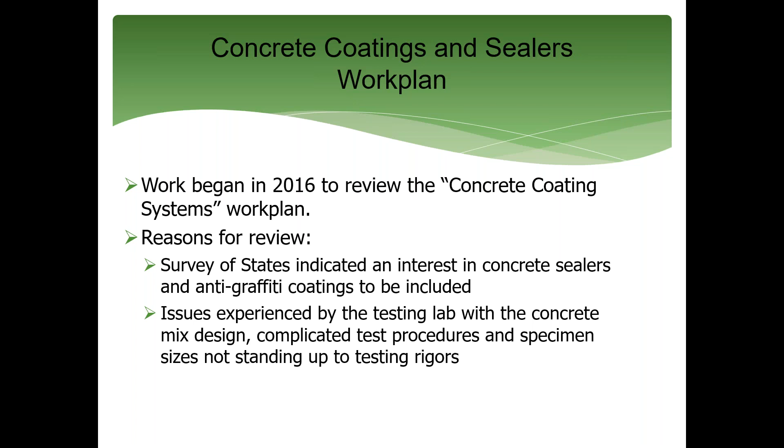The Concrete Coatings Technical Committee formed a task force to review the work plan and research the best practices in the field of concrete coating and sealer evaluation. Amongst those surveyed during this effort were SSPC, industry partners, and states. States were also asked about their needs in the area of concrete coatings and sealers.

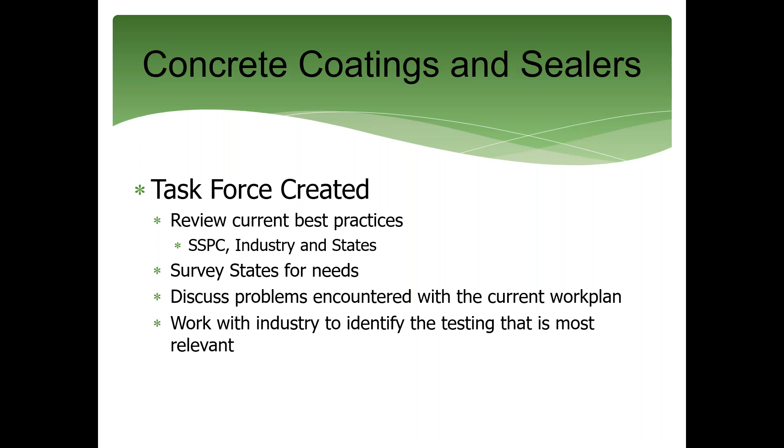The test lab for the evaluations performed from 2014 to 2016 was contacted as well to discuss the issues with the work plan and any improvements that they would recommend. In addition, industry was approached to determine the relevant testing performed by those manufacturers to determine their coating and sealer performance.

What the task force found was that AASHTO TP96 was successfully being used by other agencies to evaluate concrete coatings and sealers. The mix design and testing protocols were being used to effectively evaluate the performance of concrete coatings and sealers. In addition, other agencies have in-house testing methods that include freeze-thaw and scaling resistance, as well as chloride ion penetration testing. The in-house methods were collected and reviewed and found to be similar in nature to AASHTO TP96 procedures.

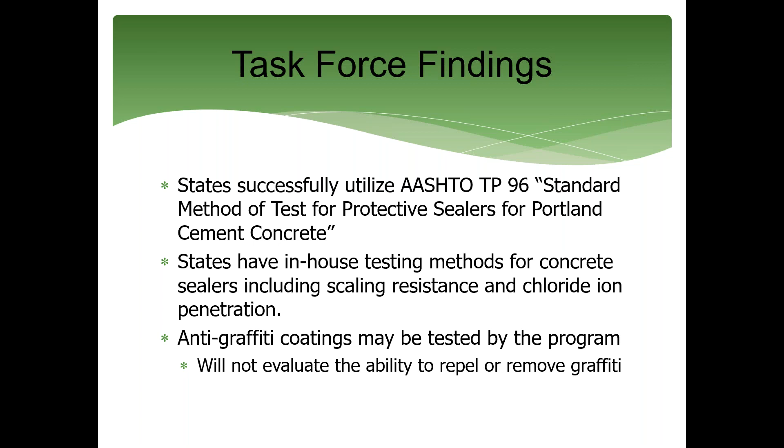Anti-graffiti coatings were also found to be a need at the agency level. The issue with anti-graffiti coatings is the challenge of testing anti-graffiti coating performance as it relates to the ability to repel graffiti and/or remove graffiti. The task force opted to focus efforts on the sealer and coating testing and hopes to add anti-graffiti coating performance testing in later iterations of this work plan.

The task force chose to use AASHTO TP96 as the backbone of the new concrete coatings and sealer work plan. Due to its successful use by other agencies, it was considered a tried and tested methodology from which to build our work plan. TP96 includes the following testing parameters: sealer characterization, water vapor transmission, salt water absorption, chloride permeability, sealer penetration depth or coating thickness, UV weathering and cyclic saltwater ponding, and resistance to alkali.

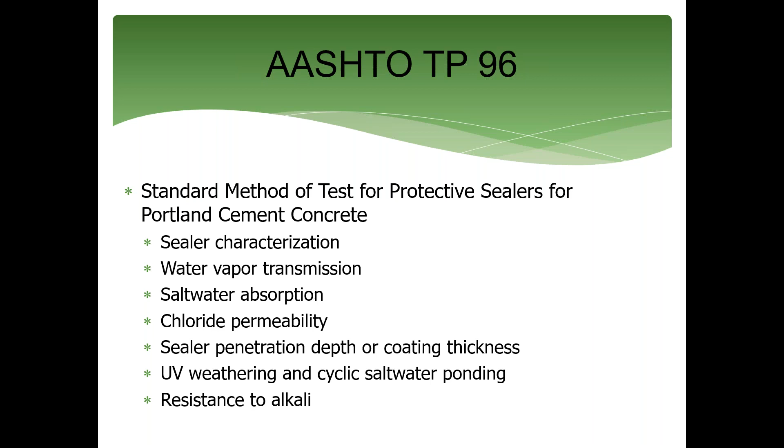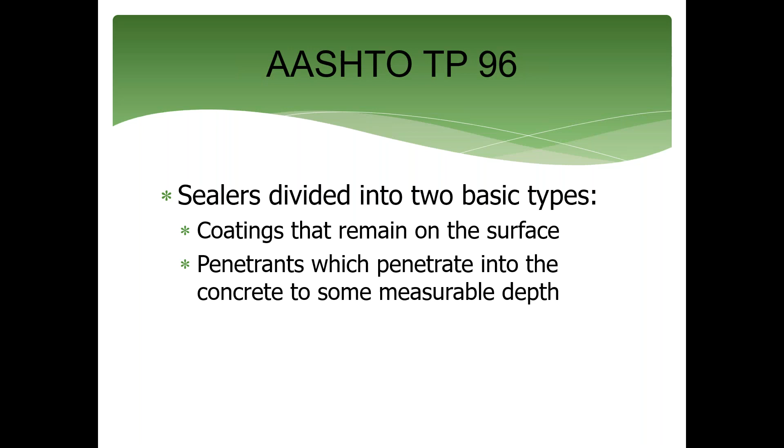TP96 classifies sealers into two types: film forming, or coatings that remain on the surface of the concrete, or penetrating, or materials that penetrate into the concrete to some measurable depth. Concrete coatings and sealers are intended to provide the universal properties of reducing water and chloride ion penetration, extending the service life of the concrete, and they must be resistant to traffic wear and the various environmental conditions the concrete and coatings and sealers may be exposed to.

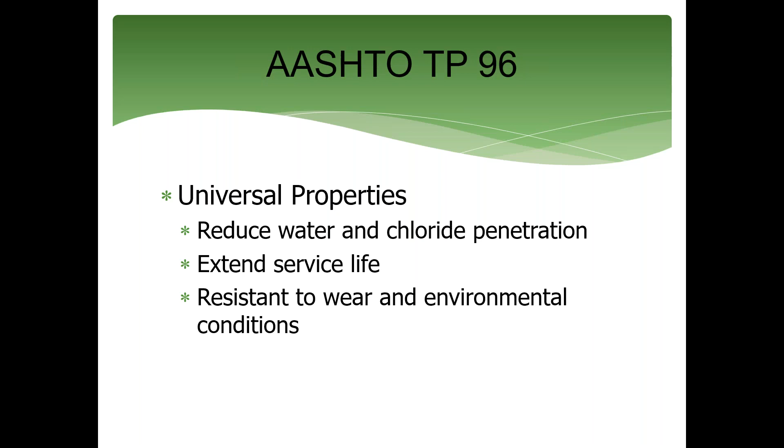The general types of sealers and coatings as defined by TP96 include linseed oil, epoxy resins, silanes and siloxanes, methacrylates, sodium silicates, urethane, coal tar pitch, tar primer, and seal. The work plan includes coating systems that can be applied individually or as a system of multiple coatings.

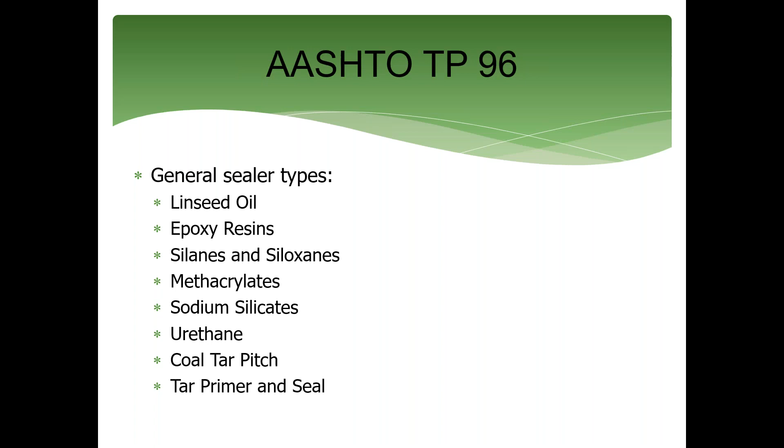The key concepts the task force needed to address in the revision of the work plan were: one, to find a freeze-thaw stable mix design; two, fabricate standardized size prisms for testing procedures, and to combine those two elements to prepare sample specimens that would hold up to the rigors of the testing and allow the performance of the coating or sealer to be evaluated, not the quality of the concrete and/or the weakness of the fabricated specimen.

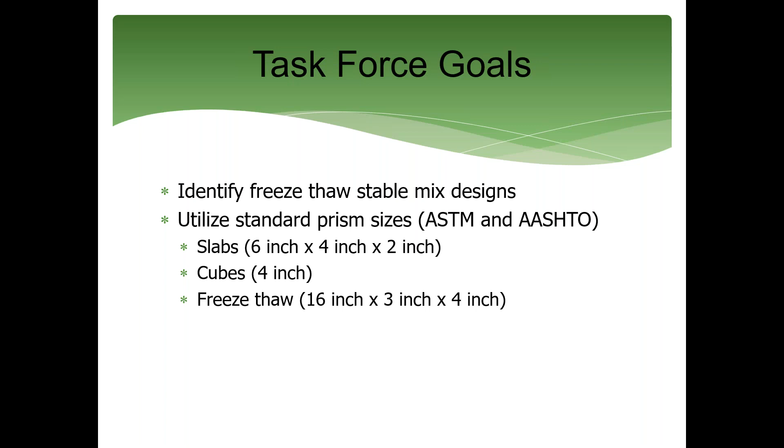Eliminating the weaknesses in the sample fabrication steps and standardizing the methods and mix design are vital steps to the program's success. The standardized prism sizes were gathered from ASTM and AASHTO procedures. The slabs used in the program are 6 inches by 4 inches by 2 inches. The cubes are now 4-inch cubes, and the freeze-thaw prisms are now 16 inches by 3 inches by 4 inches.

The task force was made aware of the industry concerns regarding the quantity of tests performed and the relevance of those tests to expected field performance. The task force attempted to streamline the testing to focus on the most relevant tests. The streamlining of the work plan should improve the timeline of results and lower the overall cost of the program for the manufacturers.

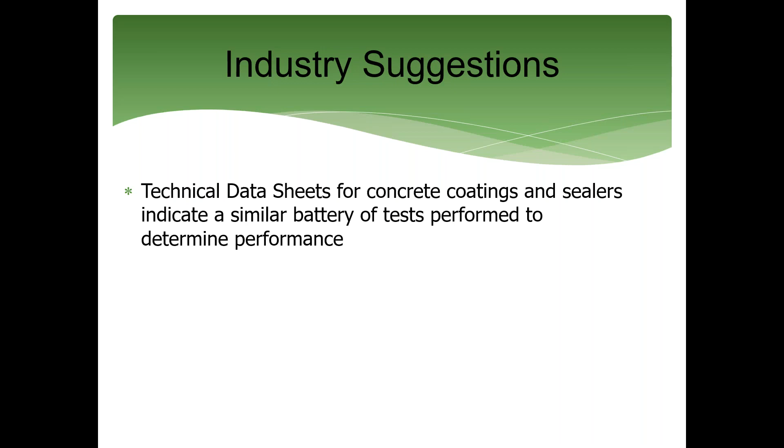The task force reviewed manufacturer technical data sheets for a variety of different materials that fall under the concrete coating and sealer categories. These technical data sheets were used to identify the test methods routinely used and reported on the sheets. The task force cross-referenced many of those typical methods with TP96, and many of the same ASTM and AASHTO methods were employed. This further substantiated the move to AASHTO TP96 as the backbone of the new concrete coatings and sealer work plan.

After extensive research and review, the task force identified the following goals and moved forward to rewrite the current concrete coating and sealer work plan by using AASHTO TP96 as its backbone: work to standardize the concrete mix design or mix designs, standardize the test prism sizes, and work with industry, states, and testing labs to review and edit the final draft.

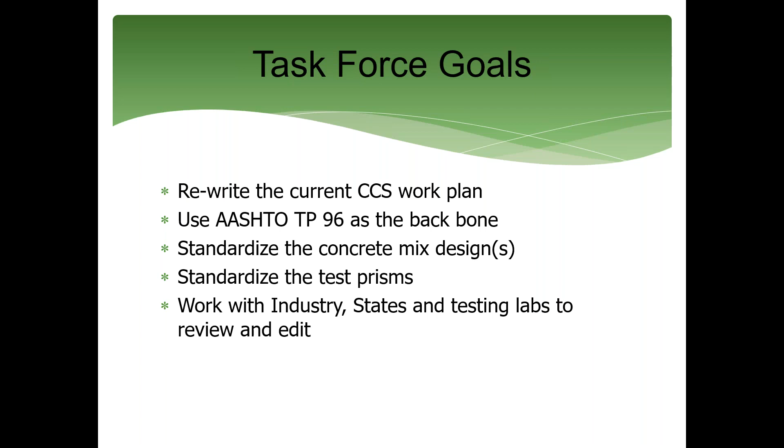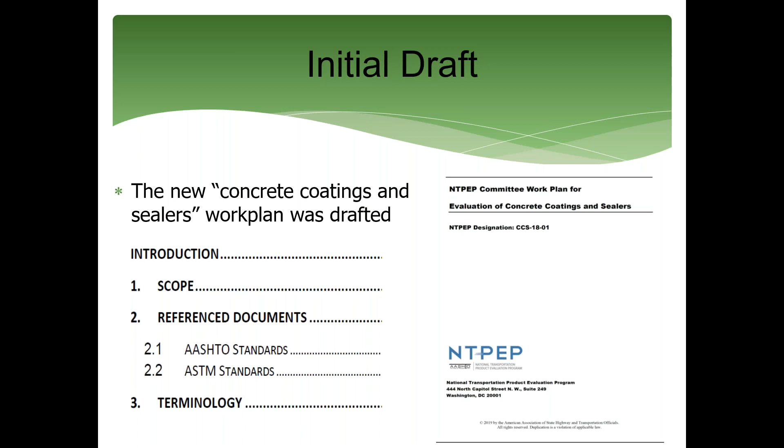The following slides will walk us through the new 2018 Concrete Coatings and Sealer Work Plan. The program was formerly the Concrete Coating Systems Evaluation Program, and with the introduction of concrete sealers to the program is now named Concrete Coatings and Sealers. The new work plan is divided into 8 sections. I will now go through each section of the work plan to familiarize you with the program.

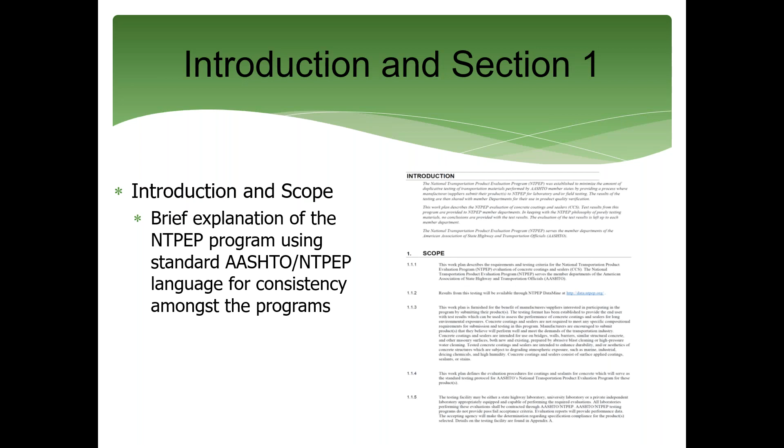The introduction and Section 1 scope provide a basic explanation of the program and include standard language consistently used for all NTPEP programs. Section 1 includes reference to Datamine and how to access results generated by the evaluation program. Section 2 is the reference documents. This section includes all the new AASHTO and ASTM methods used by the program and the primary standards used by industry to evaluate concrete coatings and sealers.

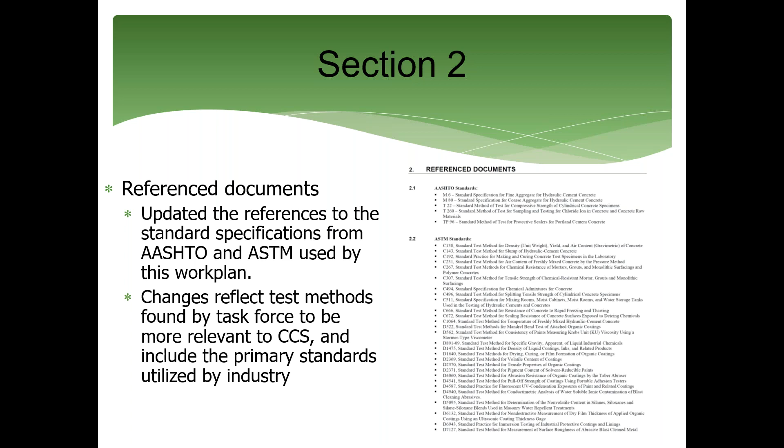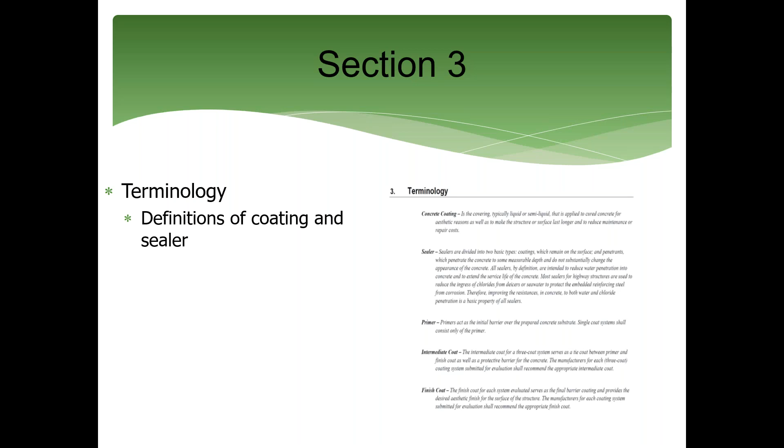Section 3 is the terminology. This just gives you some basic definitions of concrete coatings, sealers, and the coating systems, the different coats that make up systems tested by the program. Section 4 is the program overview. It covers the NTPEP guidelines, responsibilities, and expectations for the lead state, testing lab, and manufacturers who are participating in the program. This section contains standard language consistent with all NTPEP programs.

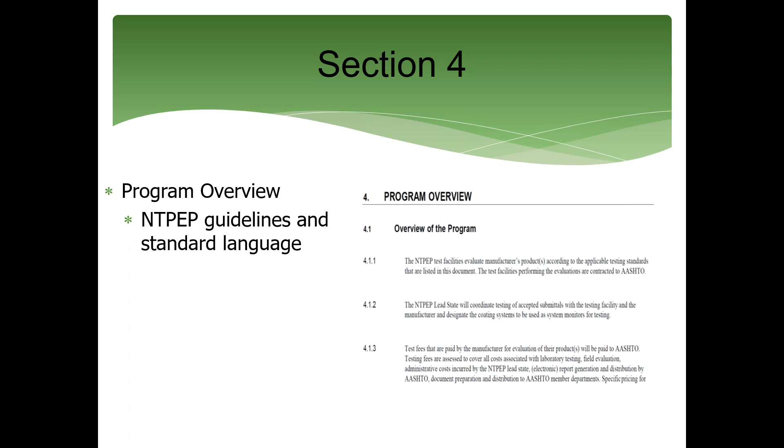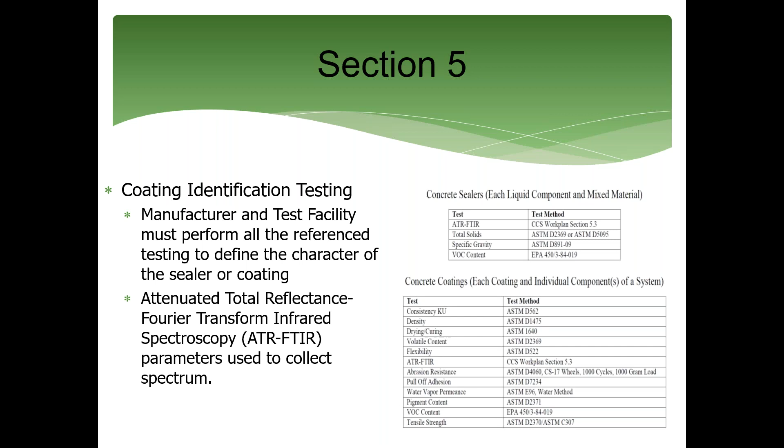Thank you, Kelly. I'd like to talk about the identification testing. It's also called fingerprint testing. It's performed to ensure that the qualified product is consistent with the product delivered for service. The FTIR is the infrared scans that is performed on individual components if the liquid coating material is a multi-component, as well as the mixed material, or if it's a single component material, the FTIR is run on that material only. Both sealers and concrete coatings are tested by FTIR.

Concrete sealers are additionally tested for solids, specific gravity, and VOC. Concrete coatings are tested for VOC and solids using the same methods as the sealers. However, they're also tested for viscosity, density, dry time, flexibility, abrasion, water vapor permeance, pigment content, and tensile strength.

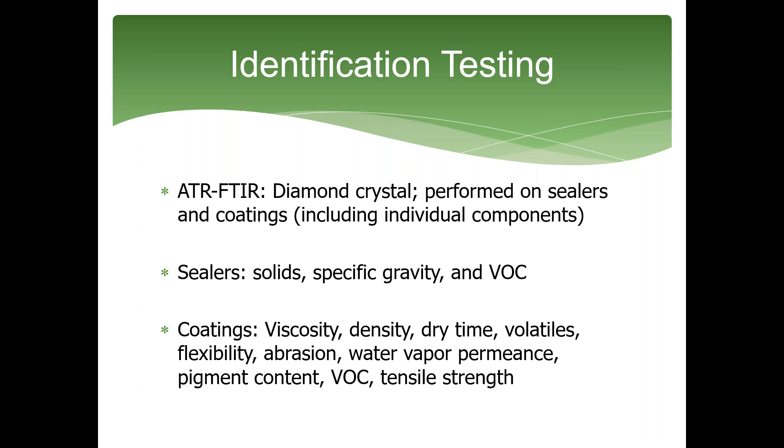Section 6 relates to... Sorry, the performance. I was muted. I've got it, Carly.

Sorry. Section 6 is the performance test to be performed by the testing facility. It includes the heart of the program and where agencies will gain the most value from the program. This group of performance tests includes standardized procedures used to evaluate concrete coatings and sealers. Again, the two categories are broken into concrete sealer performance test and concrete coatings performance test.

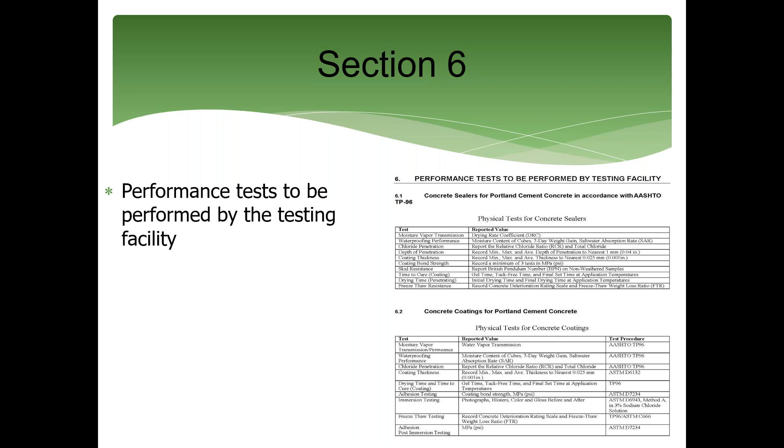For concrete sealers, testing is performed according to AASHTO TP96. 3 treated and 3 untreated cubes are stored at conditions of 23 degrees C and 50% relative humidity, and they're tested for moisture vapor transmission at 0, 7, and 14 days. The waterproofing ability is tested by measuring the weight gain following 7 days immersion in a 15% sodium chloride solution. The chloride penetration is tested by continuing the saltwater immersion and weighing the cubes at 14 and 21 days.

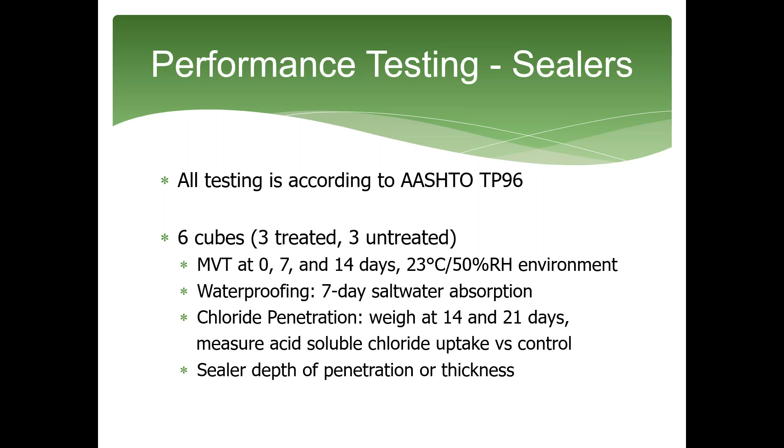The cubes are then split in half. Half is tested for chloride according to AASHTO T260 at 4 sampling depths, and half is tested for sealer penetration or thickness. Penetration depth involves immersing the sample in a solution of dye, and the coating thickness can be determined by ASTM D6132 or microscopic examination. Coating bond strength is evaluated according to the pull-off adhesion test, which is ASTM D4541. Skid resistance is evaluated for both treated and untreated specimens by the British pendulum method.

Curing properties are evaluated differently for penetrating and coating type sealers. Both involve drilling a 3/4 inch by 3/4 inch hole in the cube. However, the coating type sealers are tested for gel time, tack-free time, and final set. Penetrating sealers are tested for initial and final drying time. In both cases, the testing is performed at 2 temperatures.

Freeze-thaw resistance is performed according to ASTM C666 method A. Every 100 cycles, the sealed samples are weighed and visually examined. Samples are tested for a total of 300 cycles. The samples are evaluated on the concrete deterioration rating scale, and the freeze-thaw weight loss ratio is calculated.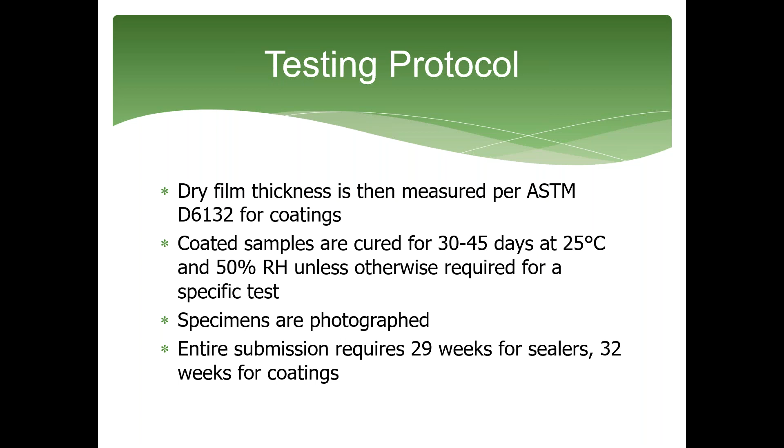Testing data results are maintained in an online database, NTPEP Datamine, at data.ntpep.org. Access to data in Datamine does require a login. Vendor data is kept confidential between vendors, and DOTs have access to all of this data.

To submit an application on the industry side, all an industry participant has to do is log in to Datamine, click Submit an Application underneath the Concrete Coatings Technical Committee section, and begin the application process.

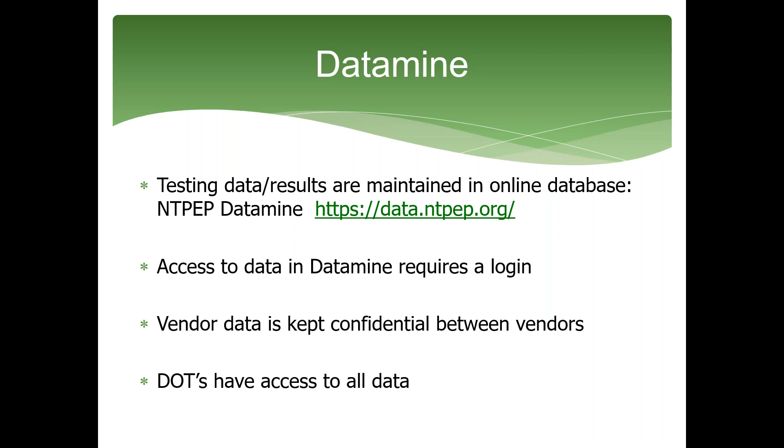The request for a standardized one-stop shop for evaluating concrete coatings and sealers has been created. This new work plan includes current best practices, AASHTO TP 96, and has been used successfully by agencies since 2013. Industry has been a part of this review and revision, and the concerns with the old work plan have been addressed. Now it is time to start implementing the new concrete coatings and sealers program.

The benefit to the manufacturers is that now they have one place to send material for evaluation, and those results can be shared via Datamine to all the agencies to use to compare to their own specifications to verify compliance.

The benefits to agencies are the ability to have a clearinghouse of testing data gathered using standardized test methods on materials widely used in construction and maintenance.

The next steps are for the agencies to start requiring the concrete coating and sealer program, and to recommend to any concrete coating and sealer manufacturer to use the program as well.